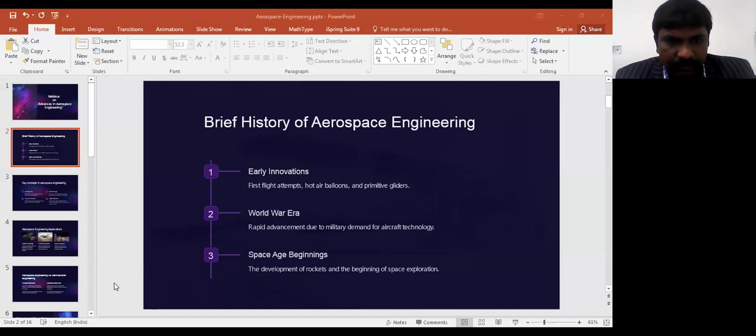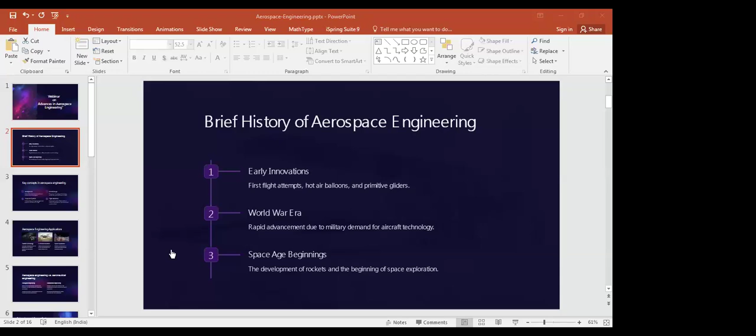Sir, sorry to interrupt, but your video is not coming. One minute. Sir, please share the screen again with that video. Sir, can you see me now? Sir, we can see your presentation. All you need to do is click stop sharing and then click share screen again. Yes sir, now select that video, sir. Let me go with this entire screen, sir. That will be right, sir. Right. Sir, now can you see, sir? Yes sir, now it is visible. So let me repeat this point.

Looks like upside down. Yes. So actually, the lift, how the lift is generated in our aircraft, the main and fundamental principle is, under the wings of our aircraft we will be having high pressure, and on the top of the wing we will be having less pressure. This is the theorem we call Bernoulli's principle. This is the fundamental principle behind how the lift is generated in our atmospheric vehicle. So we have adopted all the basic scientific things from our nature only.

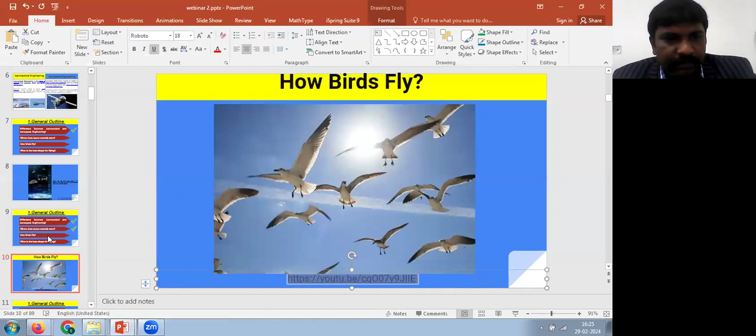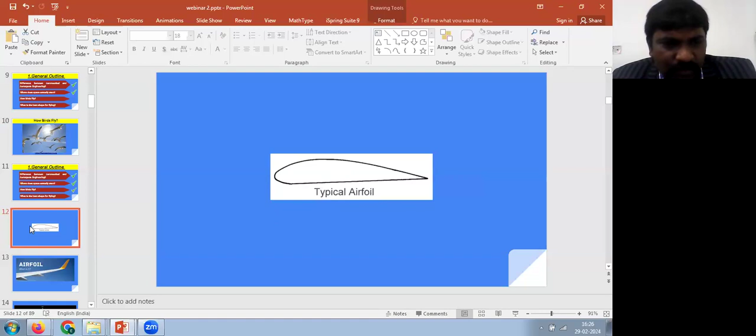Let me come back to this presentation. The next thing is, what shape do we need for things to fly? This is the shape we call the airfoil shape. It is perfectly suitable to take the air without much drag. Drag is a kind of resistive force which resists the motion of the body. So this is the shape we have found in order to take the aircraft into the air, and this will help us take all vehicles into the air. So this is the airfoil.

Each and every aircraft component, you can take it out, the airframe structural member will look like this. The shape will have a leading edge followed by a trailing edge. There will be four forces acting on an airfoil: lift, drag, thrust, and weight. Let me quickly outline this. So this is the wing.

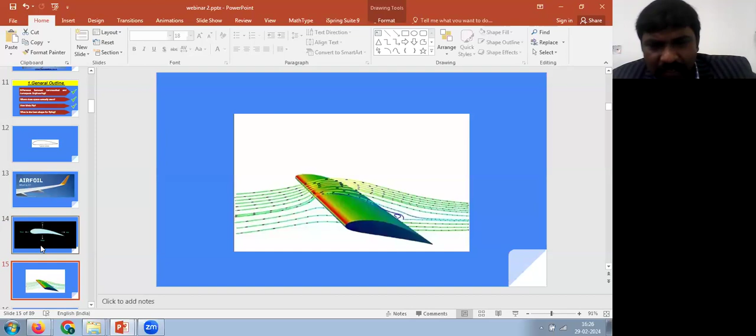Whenever you want to design your own aircraft or wing, we need to analyze the wing with respect to the air. We have to analyze how much drag it is producing, how the flow is, everything we need to understand so that it will be capable of producing lift or not. We have to simulate before taking the model into the final thing.

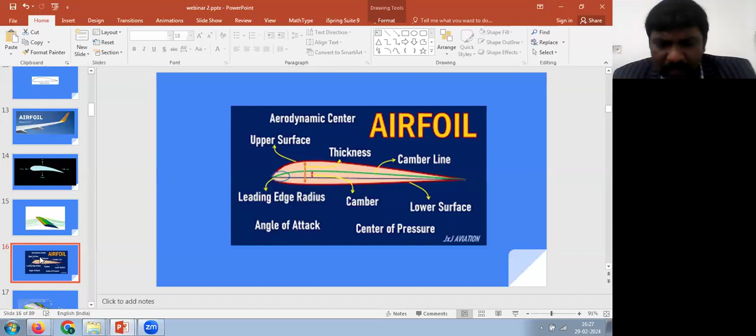This is the airfoil data, there are three classifications: positive cambered, negative cambered, and symmetrical airfoil. We will be using most of the time positive cambered airfoil. Why do we call it positive cambered? Whenever the angle of attack is zero, you will be getting a positive lift. That's why we are using this positive cambered airfoil. So this is all about the atmospheric vehicle fundamentals.

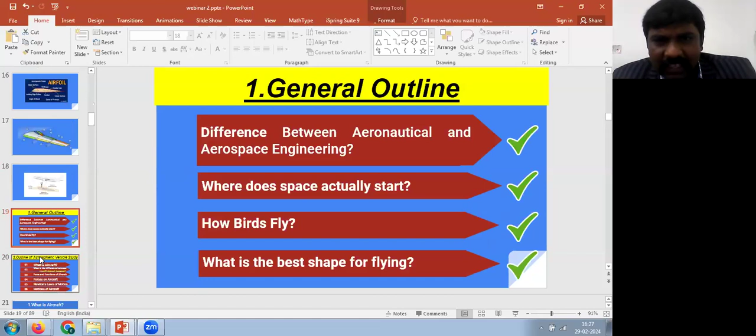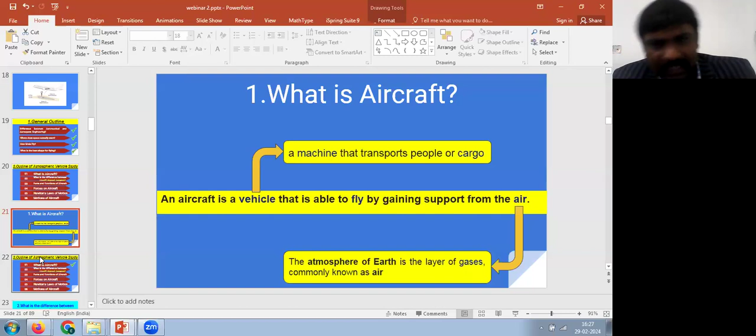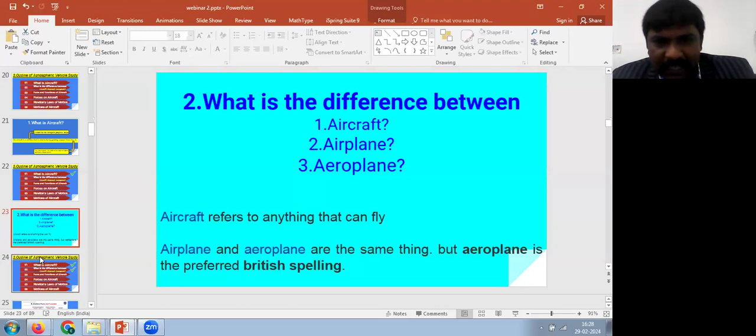Now, a general outline about this atmospheric vehicle. We need to know the main difference between aircraft, airplane, and aeroplane. Aircraft is a machine which helps us transport passengers and cargo from one place to another. Aircraft refers to whichever vehicle is flying. Airplane and aeroplane are both the same, but aeroplane is the British spelling, that is the main difference. Then these are all the fundamental parts and functions of your airplane.

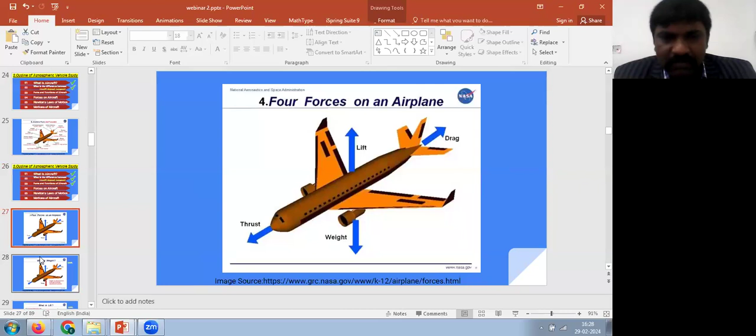And when you come to the forces, there are four forces that we discussed: thrust, drag, lift, and weight.

Then what are all the shapes which are going to affect the drag? Drag is nothing but the resistive force which will be dragging the aircraft. And we know why we are using the cylindrical shape in our fuselage. This is a beautiful area where people have been working for the past decades, going back to the Wright brothers' time.

There are two reasons behind this. One is to minimize the drag, and the second is a concept called stress concentration level. The stress concentration level will be uniform throughout the cylindrical shape. That's why we use this fuselage section in cylindrical shape, rather than a square or rectangular shape. When using square or rectangular shapes, the stress concentration level will not be uniformly distributed along the length of the fuselage.

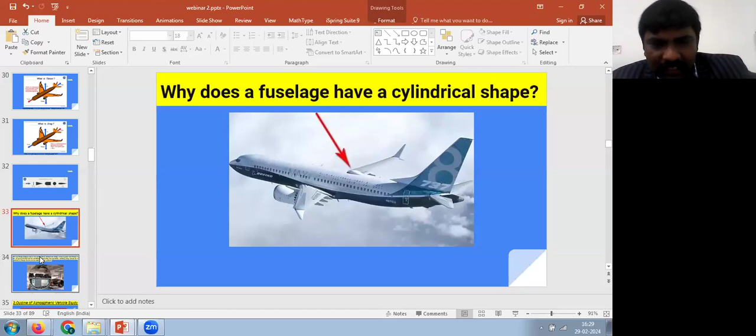If you use a square or rectangular shape, the stress concentration level will be very high at the corners. So your structure will collapse over time, within a short period, because the stress concentration level is higher at the corners. That is the reason.

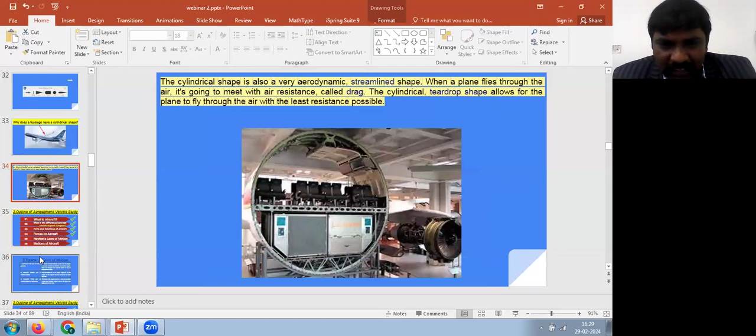So people have started doing a lot of research to modify the materials of the fuselage, and they are still doing research to develop new materials for the fuselage.

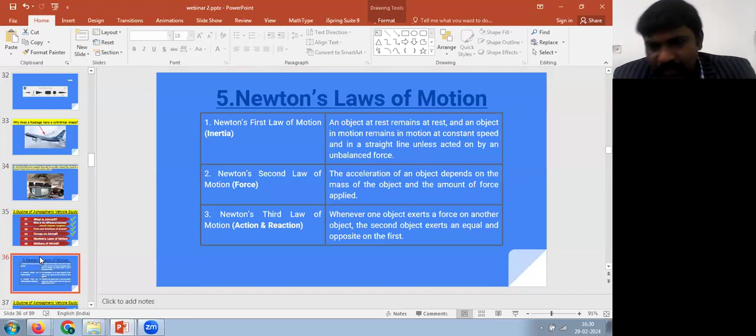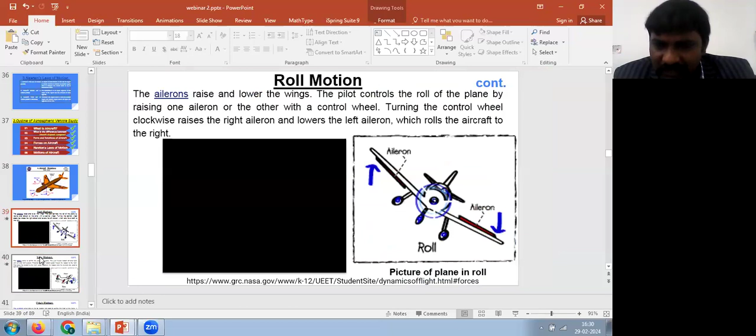So as we know, Newton's three laws. Then let me go ahead. There are three rotations in our aircraft: pitch, roll, and yaw.

Then when we speak about the space vehicle, most of the time aerospace engineers will be enthusiastic to work on this space vehicle. The main difference is when we take the space vehicle into account.

So to discuss the space vehicle, you need to understand both atmospheric and space environments. In sensible atmosphere, you need to take all the aerodynamic phenomena into account, and in vacuum, in space, you need to account for the space environment, like radiation, sun influence, and other planets' influence. If you are discussing interplanetary trajectory, you have to consider everything, so it's easy to track the trajectory of your mission.

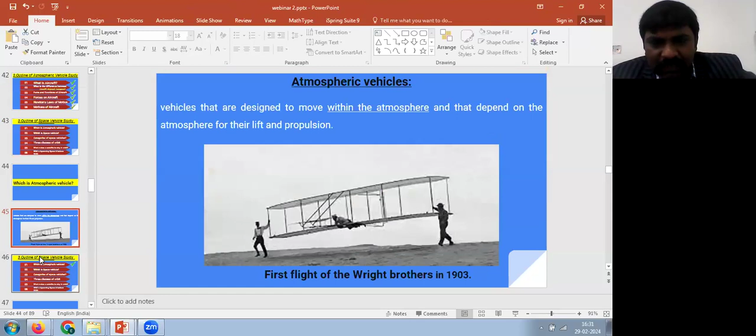So we can discuss a few things about the space vehicle. What is an atmospheric vehicle? Whatever is within the atmosphere, we can call it an atmospheric vehicle. What is a space vehicle? A space vehicle is one that is beyond the atmosphere.

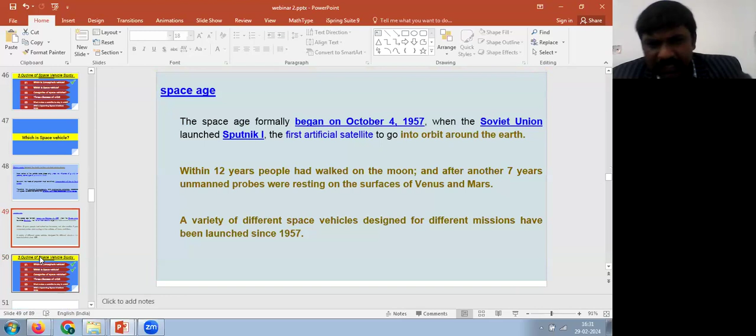Then the categories of space vehicles can be divided into three: Earth satellites, lunar, and interplanetary vehicles. Interplanetary is nothing but launching a satellite from Earth to Mars, for example. That comes under interplanetary vehicles.

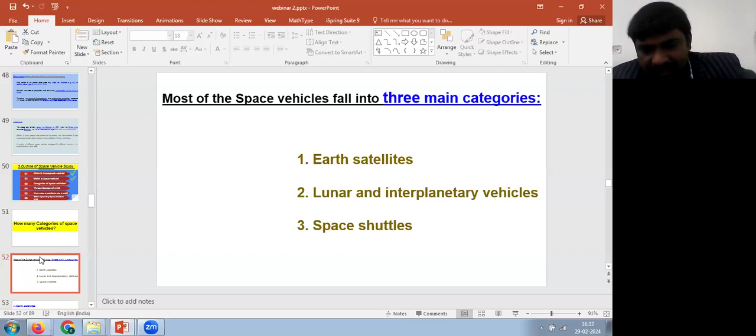Then lunar is nothing but Earth to our moon. If you are sending a satellite there, that is called a lunar mission. The best example is Chandrayaan 1, 2, 3, which comes under lunar missions, like the space shuttle which helps us keep the things happening.

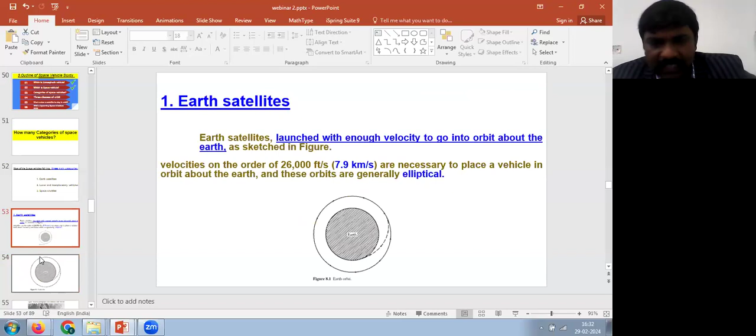Then the Earth satellite helps us observe the Earth, and we can use it for scientific reasons as well. Then for lunar missions, we can take our Indian ISRO mission, Chandrayaan 1, 2, 3, as examples.

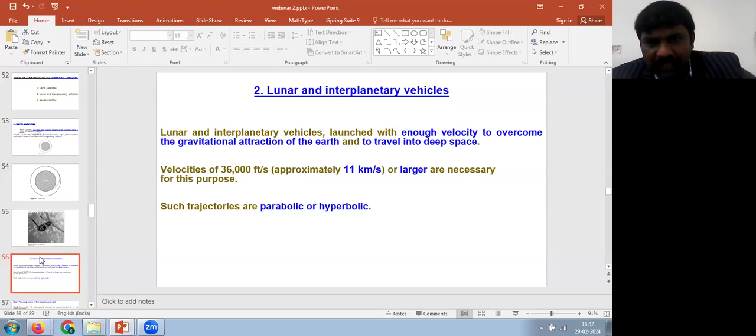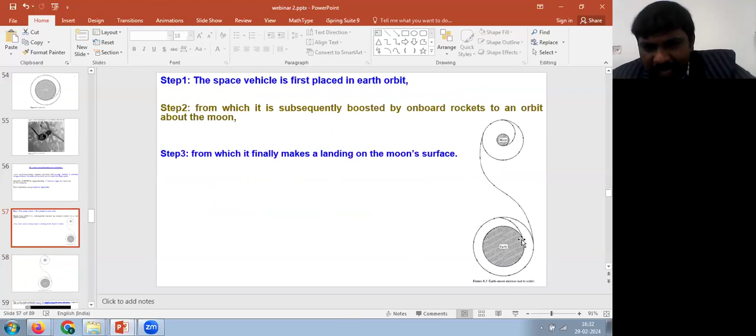Then this is a simple trajectory showing how we take the satellite space vehicle from one planet to another. Below we can see the Earth, which is shaded. At the top you can see the moon, as we are planning to send a satellite from Earth to the moon. This is the trajectory profile of our planet.

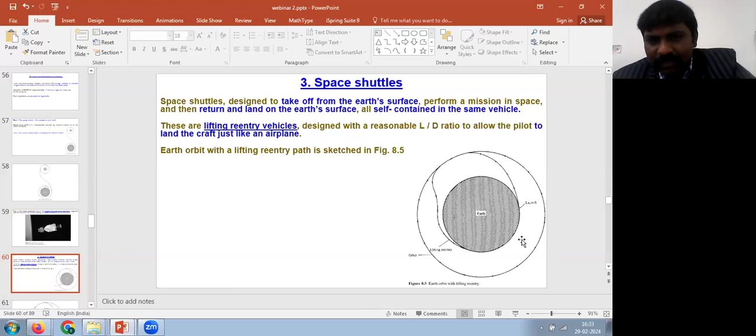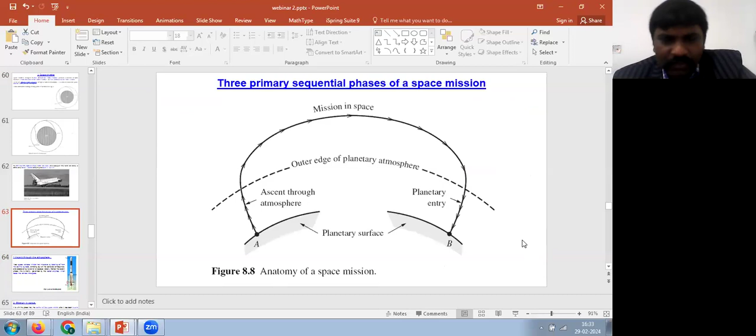This is a small video. Let me play this small video.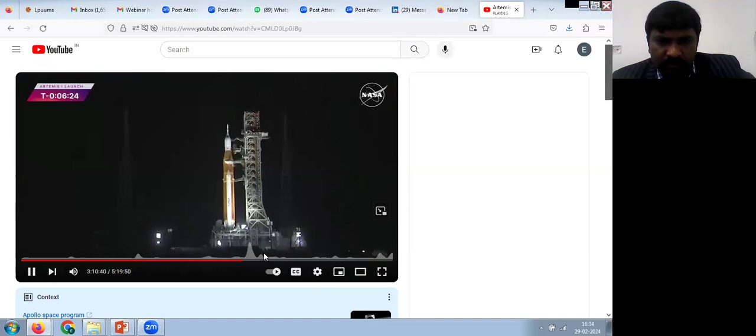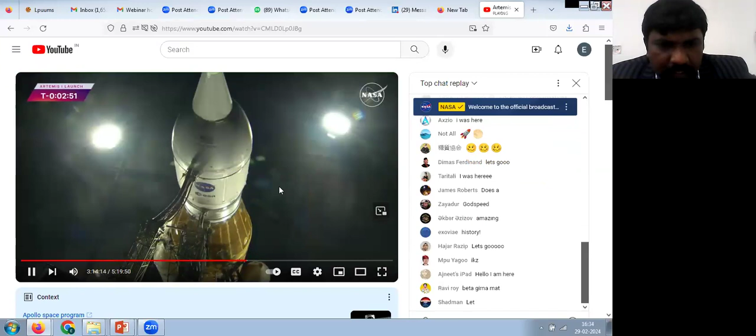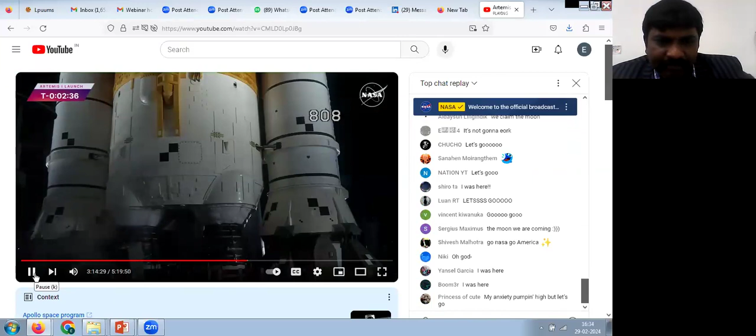So there are two things we must understand: the satellite and the launch vehicle. The launch vehicle helps us take the satellite into a particular orbit. Once the satellite is injected into that orbit, it starts working, takes inputs from the orbit, and sends information to the Earth wherever we are focusing. That will give us information about geographical data. With that we can track geographical locations, monitor agriculture fields, and use it for navigation and defense purposes.

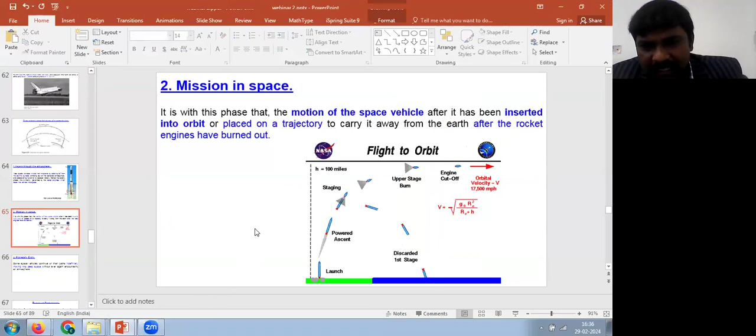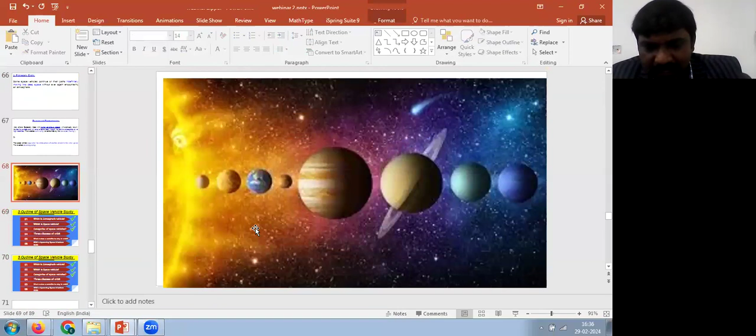So this is a simple thing, and one more thing we need to know is the mission in space, how it will be launched, followed by ascent, then staging, then separation, then at last we will be injecting into space, then re-entry. There are different planets we are interested in, but mostly we deal with Earth and Mars. Whenever you need to reach other planets, you need more propellant. That is the challenging part that all space agencies are facing. So these are all some fundamental things.

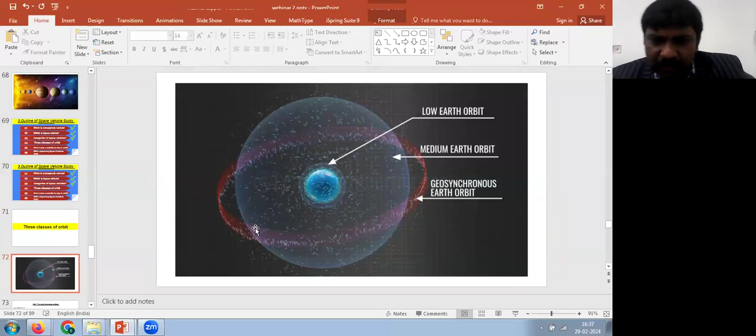How are orbits classified? Based on altitude, based on position, and based on inclination, they are classified. So LEO, GEO, MEO and all are there. There are different orbits, and based on altitude we can classify them.

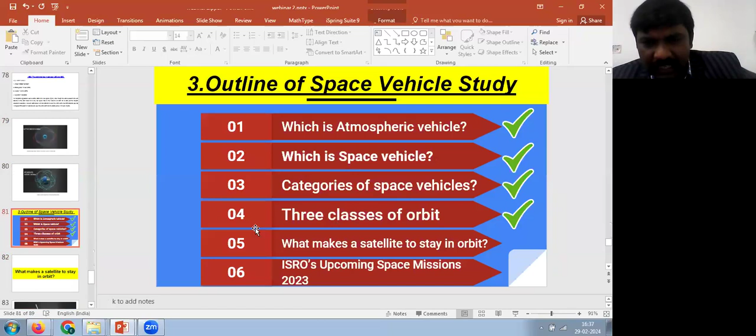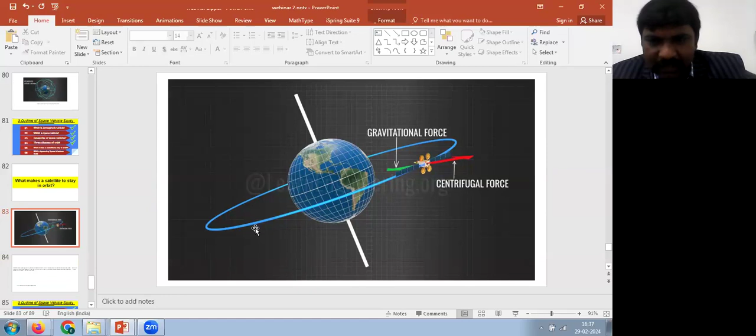What keeps the satellite in orbit? There is a balance between gravitational force and centrifugal force which keeps your satellite in orbit. Unless you give any disturbance to the satellite, it will keep revolving in the same orbit. If you increase the velocity, it will leave the current orbit and enter a second orbit. That we know.

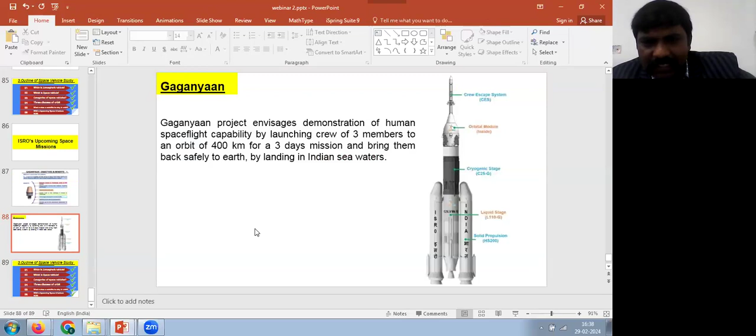Then, what is ISRO's upcoming mission? We know our Gaganyaan mission, which was day before yesterday. We got the information that we have found 4 astronauts who are ready to take our space mission, Gaganyaan, today. So this gives a rough idea of the capacity. This data was published long back, but now maybe it has changed.

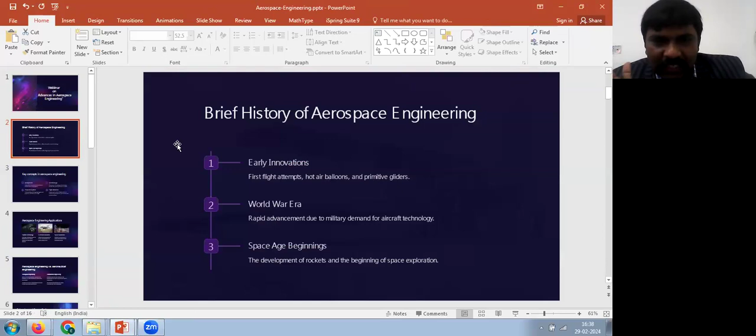This is the general thing we need to know before discussing the advancements of aerospace engineering. Now we can start discussing the advances of aerospace engineering. Now have a look at it.

In aerospace engineering, we can take 4 main domains. First, we can take aerodynamics. In aerodynamics, you can do many works, like take any structural member and analyze the flow, and then try to bring an innovative or novel structure to improve the aerodynamics. Next is the propulsion domain, where most of the launch vehicle space is filled with propulsion - propellant, fuel and oxidizer. About 75% of the space is occupied by the propulsion system. That is the second domain, and there are a lot of research opportunities there. Aircraft design also comes under this, as a sensible atmospheric vehicle.

So here we can do the specific performance like drag, how we can decrease and how we can increase the jet power, and everything we can do.

Then the fourth domain is flight mechanics, which will help us control the stability of the aircraft, as well as aerodynamic phenomena and gravitational effects, everything we have to control with the help of flight mechanics.

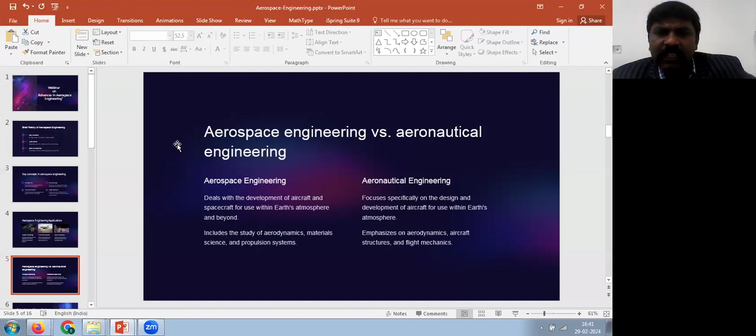Then what will be the education and career path for aerospace engineering? So aerodynamics is the domain where people deal with the flow analysis of the structural member, covering both aerospace and aeronautical. They will be dealing with this aerodynamics.

Then they can choose spacecraft design also, doing research and manufacturing new materials. They can bring novel research to the scientific forum, producing research in the structural domain as well as aerodynamics. Combined together, we can do any type of research.

That will be beautiful. Whenever you are speaking about satellites, we need to take care of the skin and protect the load. So we need to do in-depth research analysis in spacecraft design as well as aerodynamics, giving more importance to the aircraft.

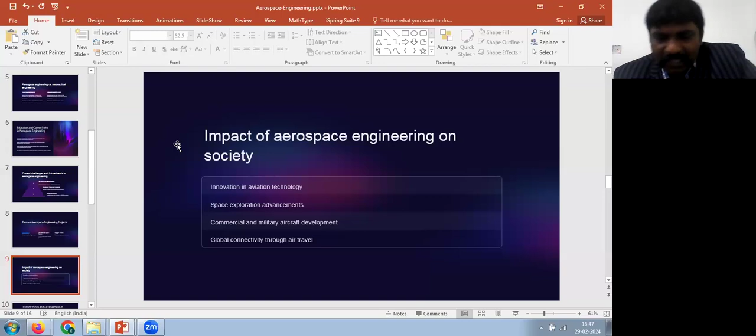What are the current advancements? We are getting into electrical propulsion and also the materials domain — innovative materials like carbon fiber based composites reinforced with nano materials such as zirconium diboride (ZrB2) and alumina (Al2O3). There are many reinforcements people are researching, and they find different materials daily. We find 3 to 4 good articles coming from real researchers, who try to give advanced materials to ISRO and other space agencies, which we adopt to better the mission profile.

Regarding the material aspect, the main advancement is in composite materials. Earlier we used micro composites, where reinforcements were in micro size, but now we've moved to nano size, where reinforcements are at the nano scale. The main benefit is that the surface area gives better dispersion at the nano size — that is the beauty of nano-based composites.

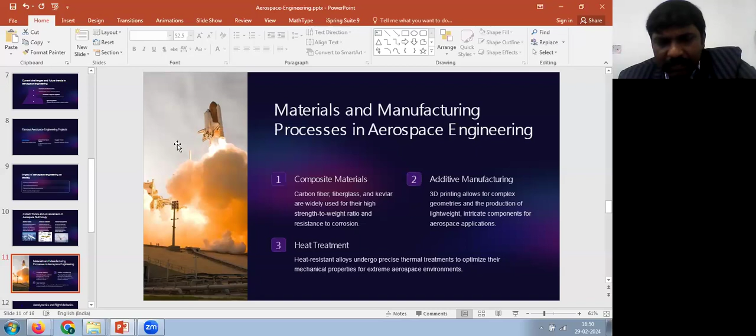We need to ensure at what level, like there are levels like T6, we need to check whether it is adapting the temperature or not. In that way, all the advanced material which will be meeting the requirements, we are using advanced material in our aerospace structures.

When we are speaking about aerodynamics and flight mechanics, nowadays we are using 3D printed structures, and we analyze that with computational packages like ANSYS, Fluent, and CFD. Based on that we will be checking stability and control, whether it is stable or not, using computational methods. Once that is done, we can admit that into the application, and if everything is good, we can take approval for commercial application.

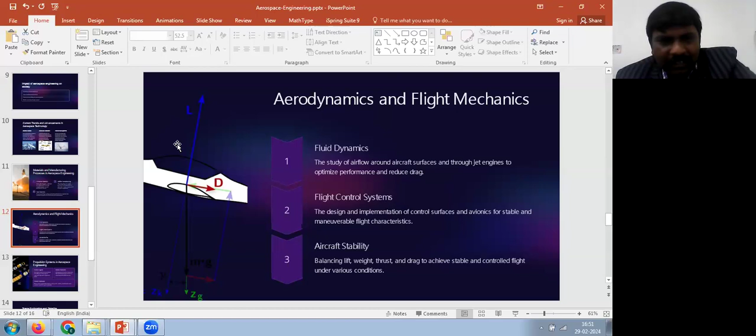Then propulsion system - we need to define it into two categories. One is jet engine, the air breathing engine which we use for aircrafts. The second one is rocket engine. Most of the time aerospace engineers will be handling both the jet engine, air breathing engine, and the non-air breathing engine, rocket engine.

So why we are calling it jet engine? We get thrust by using the jet. Jet is nothing but the burned gases which come out from the nozzle. So both of these will be very important domains in our aerospace domain.

The turbine is one we need to give more attention to, because the turbine will be designed to withstand a particular temperature, so we need to design accordingly and choose the suitable material for the turbine also. Then whenever we speak about the gases coming out through the nozzle, how you make the nozzle structure and nozzle wall, what material it is made up of, what type of cooling system you provide - everything we have to give more attention to.

Then electric propulsion - nowadays we are using this, and the very important point is electric propulsion. We are most of the time focusing on it.

What is the main drawback of our Chandrayaan 3? Our Chandrayaan 3 mission is only capable of giving information for 14 days, 14 earth days. What will happen after 14 days? We don't have any power to get information about the lunar surface. That is the main drawback.

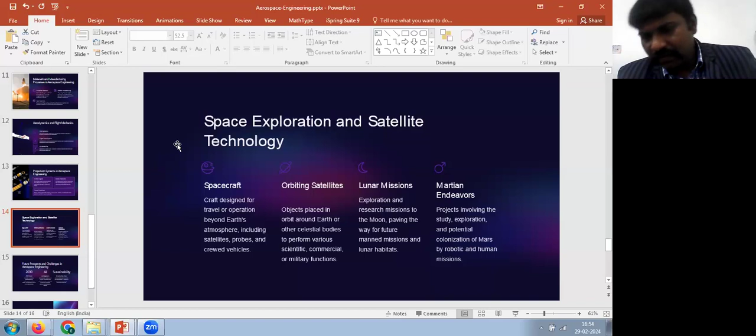Now the future perspective is about how challenging it is and how we are going to eradicate this. Doubtlessly, we are now going towards AI integration in all sectors, with machine learning and all the things coming under automation. We will be taking the help of decision making and optimization with AI technology. Now the technology is so simple - we are integrating everything with AI integration.

So we will be saving time, and we will be getting the optimum input and optimum parameters. We are going to get the final product which comes out as we are expecting. But in the older days, we used the conventional method to get the optimum parameters. With AI tools, we can easily find out the optimum parameters and all - that is the beauty of this.

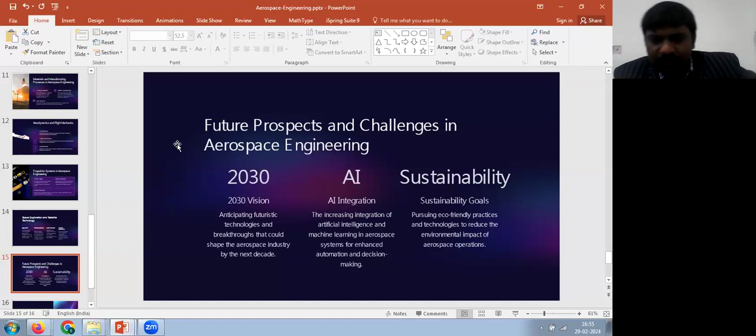As of now, we are focusing on this next decade where AI will be the one taking over the entire aerospace domain, dominating the whole sector. The final conclusion regarding the impact on aerospace: you have to divide it into three areas - propulsion, aerodynamics, and flight dynamics. We need to define where we are going to modify things, and that modification will be optimum using AI tools.

After that, we will be taking sustainability into account in our aerospace domain. Sustainability means we should not contaminate nature and should be eco-friendly in everything - the gases that come out from the nozzle should not spoil the environment or nature. You have to keep all these points in mind, and then decide which type of propellant, and which combination of fuel and oxidizer, we are taking into consideration before finalizing things.

The last point is we are going with interdisciplinary approaches - aerospace domain is integrated with agriculture in order to get information about the field. Drone technology is used for harvesting and other agriculture works like fertilizer spraying. We are now fully dependent on AI technology with aerospace domain, and with that we can produce optimum, reliable, eco-friendly outcomes and achieve sustainability goals.

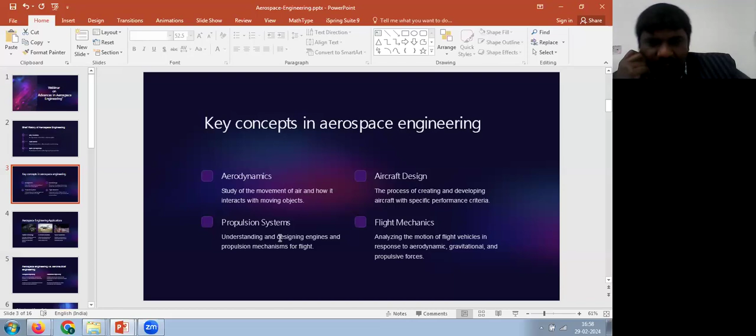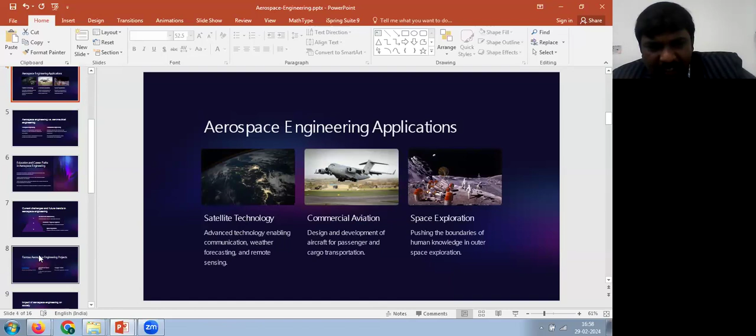Our main ultimate goal is to develop any technology that should not disturb our ecosystem, that should not disturb our nature, that should not disturb any of our surroundings. This is all we have to keep in mind before deciding and taking up any novel research in our scientific work.

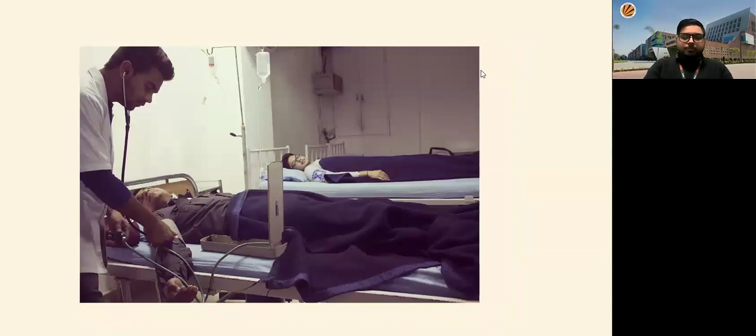So let's talk about the study grant now. As you all are engineering students, you might be preparing for JEE Mains and Advanced as well. So we also conduct our own exam, which is LPUNEST - Lovely Professional University's National Entrance and Scholarship Test. This test is basically for eligibility.

If you want to take admission into the BTech program at Lovely Professional University, you need to qualify the LPUNEST exam. Apart from this, you can get a scholarship also on the basis of this exam. The third benefit of this exam is it gives you a study grant as well.

If you are among the top 500 candidates of LPUNEST BTech and you got yourself admitted into any IIT or NIT by clearing JEE Mains or Advanced, you will be eligible for a one-time 1 lakh rupees study grant to study in IIT or NIT. The only condition is you need to be among the top 500 candidates of LPUNEST BTech and you got admission in any IIT or NIT.